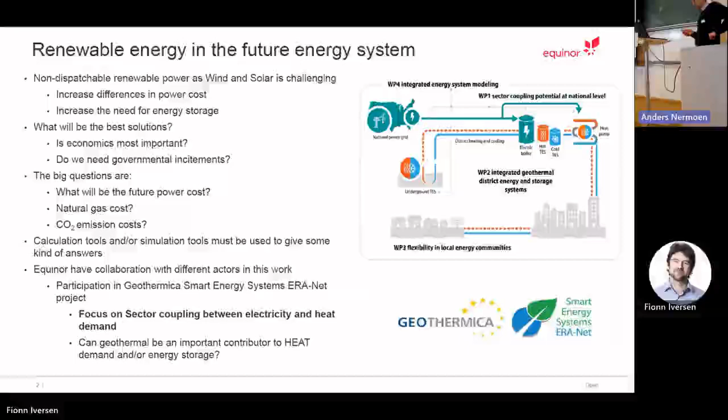So what is really sector coupling of heat, and why is it so important? I think it's to utilize the surplus cheap electricity for heat demand, which shows you have increased the flexibility in the power system. And you can have the co-firing with electricity and natural gas for heat supply - that's a typical issue for Europe. And thermal energy storage is really cheap and flexible compared to a lot of other systems, especially for low temperatures, for example district heating, hot water storage.

As residential, you can have a larger hot tap water tank. Should that be only 200 liters as we have today, more or less? Could that be 5 times as big? So we utilize this opportunity.

I think also by introducing these systems, you can reduce the curtailment of solar and wind power really much. And what is really the fact is that the heat energy demand in Europe is really huge, it's 1.5 to 2 times as large as the power demand itself. So the heat is really important.

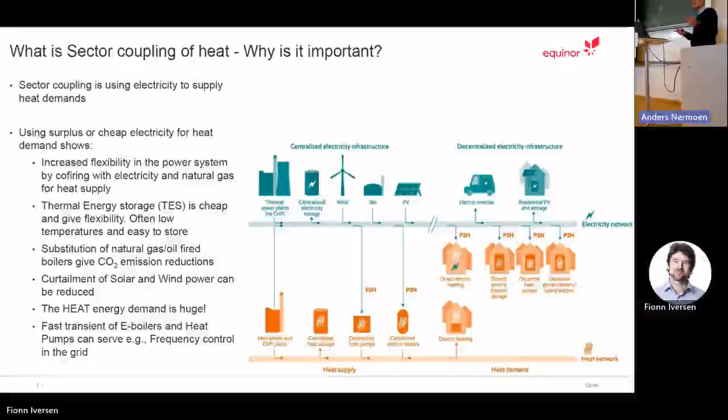One of my points here is to see that if we have the flexibility to use our e-boiler, it can ramp up very fast, so it can also be used as a frequency controller. The same as heat pumps, they can ramp up very fast if you design it for them. So it's not only the producer that can handle this grid system ancillary services. As a user, as a consumer, you can also serve these services. So that's really important.

So in my opinion, flexible heat demand can be a game changer for large implementation of renewables. And you see Europe, as a result of the Ukrainian war, is fighting to get less dependent on natural gas.

It's really hard, of course, since they use a lot of it, but they try as best they can. And we also see that the export from the Norwegian continental shelf will decrease dramatically in the next years. So what will Europe really do? How will they act, and what are the most efficient solutions for them? It's the flexible offtake of surplus electricity, how to utilize that, what's the best systems. And how can we give the best offers for wind farms?

I can give an example from an offshore wind bid in the Netherlands now, where authorities are focusing very much on how this wind bidder can give a flexible electricity demand as an offer in the bid. So if you can offer 1 gigawatt extra flexible electricity power, you will get a lot of points toward the total bid.

And in my opinion, I think this cross-sector coupling is really an answer to be able to utilize this flexible or surplus electricity power. And of course, as I discussed a lot, energy storage by geothermal can be one important issue here.

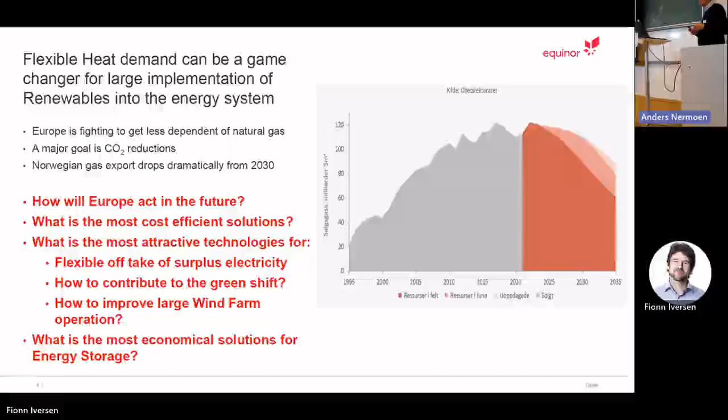So to the next, what are really the expectations on the power demand for the future? This is picked from the Energy Perspectives from Equinor, trying to predict the future. We have two scenarios: to the left, the power demand based on the Walls scenario, which is more or less the current market trends if we continue on the same basis as today. Or we have this Bridges scenario, which you could call the green scenario, the most optimistic scenario related to getting green technologies into play.

And we see the general trend here is that the demand for power is really increasing, close to doubling by 2050. And to the right-hand side, we see that yellow is solar, wind is of course big, and we see the reduction in coal, oil and gas is reduced a lot in these graphs.

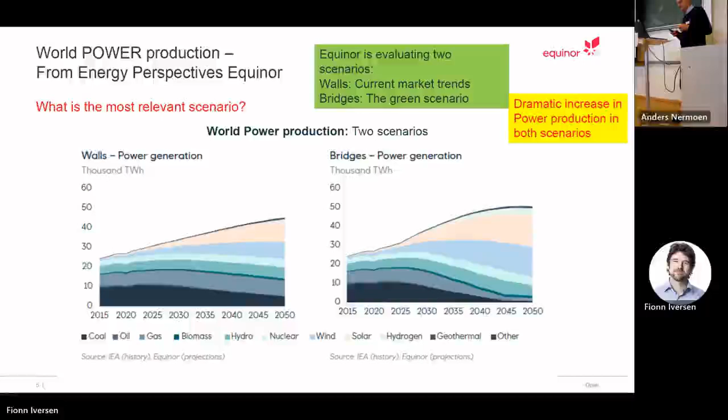If we go to the buildings energy perspectives, also picked from the Equinor estimates, we see that energy demand for heating is really huge. I've tried to explain that 3.5 billion ton oil equivalents is close to 40,000 terawatt hours of energy. So it's really a huge amount of energy.

And you see from the most optimistic scenario, this Bridges scenario, to the right, electricity is a huge supplier into the heat market. Now, we discussed here today earlier that we should not just use electricity directly into the heat market. But I think if we supply heat by heat pumps, that's really a good way to do it. And when we get this surplus electricity in huge amounts, we need to take that flexibility. E-boilers will, of course, play some role, but if we can utilize heat pumps, it will be really good.

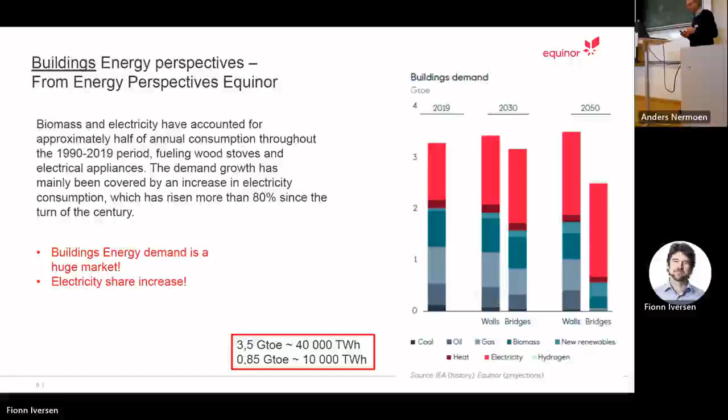And this is also for the EU market. The space heating market for EU, as you see here, is close to 4,000 terawatt hours a year for space heating and tap water demand. The electricity demand in EU is close to 3,000 terawatt hours. So we see that heat is really playing an important role.

And also gas boilers, shown in red here, so it's really a huge use of gas. I think the substitution of gas by electricity, by heat pumps, by geothermal, by everything will play a very important role. And that's really where the sector coupling potential will come into play.

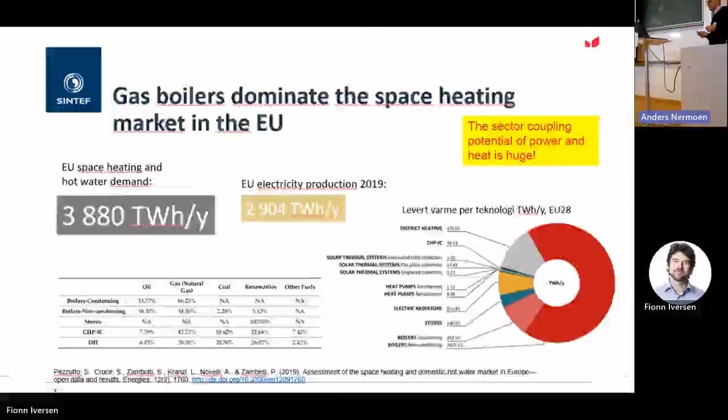And this is some background, and I have picked some results from some simulations we have been doing. We have a good collaboration with SINTEF to look into how the future can be. And here are 5 different scenarios.

So we install a wind park, and to the left bar we have a wind park serving only the electrical grid, and this system has gas boilers. GB is a gas boiler, so the bar to the left, we supply all the heat by gas boilers. So to the left, it's no electricity for supplying the heat.

If we introduce hydrogen as an option, which is somewhat costly, but if that's an option, we see that on bar number 2, 36% of the heat will then be supplied by hydrogen. The rest is still gas from the boiler.

If we then go to bar number 3, we allow electrical boilers to come into play. And then we see that we shift quite a lot of the gas into electrical boilers. So 77% of the heat is supplied by electrical boilers.

And the 4th bar is when we introduce heat pumps as an alternative. Then we see that the heat pump will almost cover 97%. So almost all the gas is substituted by a heat pump, because that's, in this case, economical benefit.

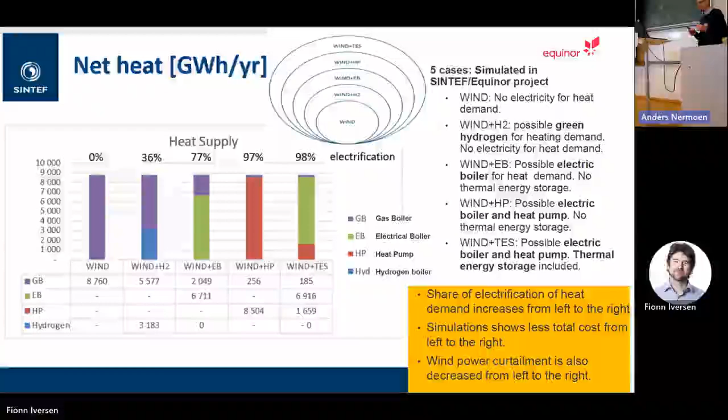And the last bar, when in addition we also introduce a thermal energy storage, we increase the flexibility even more. Then it's a somewhat interesting result. We see that we are close to 100% electrification, but the heat pump will play a minor role compared to the electrical boiler when we have this thermal energy storage into play.

But I'm first to say that all these results are, of course, depending on what prices you set for the electrical grid, what will be the price of natural gas, and what will be the price of whatever. But I think when you have this kind of simulation tools, you can do sensitivities, you can see what type of technology will be most attractive under certain conditions. So I think it's really important to have these results and start to play with new technologies and at least have the best economical inputs that you can have.

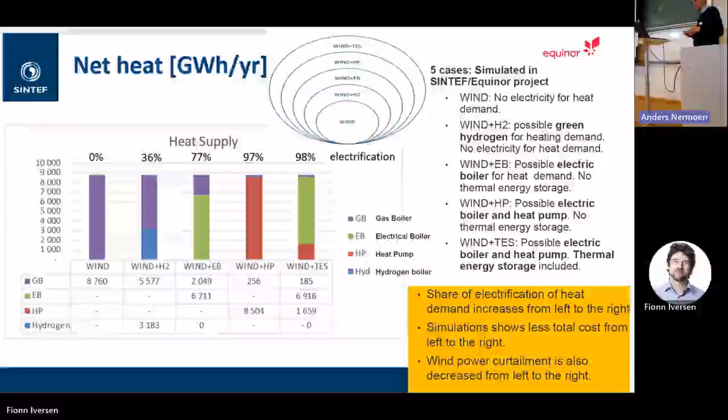So I think in general, the need for flexibility and use of surplus electricity into the heat market is really something important that we should focus on. And what I'd like to say is that this transfer from natural gas into electricity has already started. Europe has already started this sector coupling.

If you look into Berlin, Vattenfall Wärme, they are building now a very, very large tank for hot water storage in connection with their district heating system.

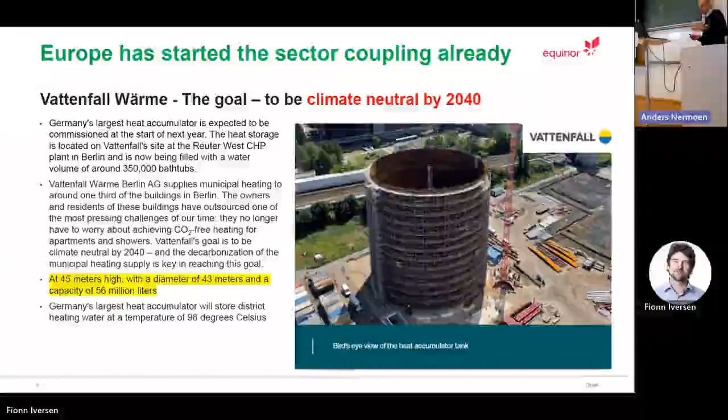And we see also in Esbjerg, Denmark, they are now introducing a heat pump supplying 50 megawatts of heat by using surplus electricity from the wind parks, windmills around. They use the heat pump, run it very hard, very tough, and when the electricity is cheap, store energy into the thermal energy storage, and deliver heat when it's needed.

And what is important, also said by the Vice President of MAN, is that sector coupling is an essential key to climate neutral energy future.

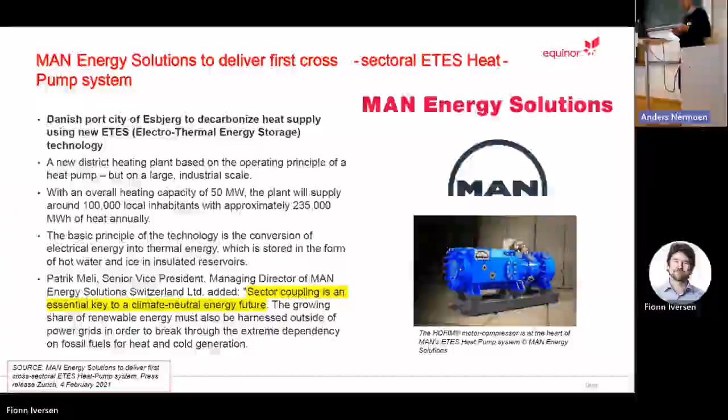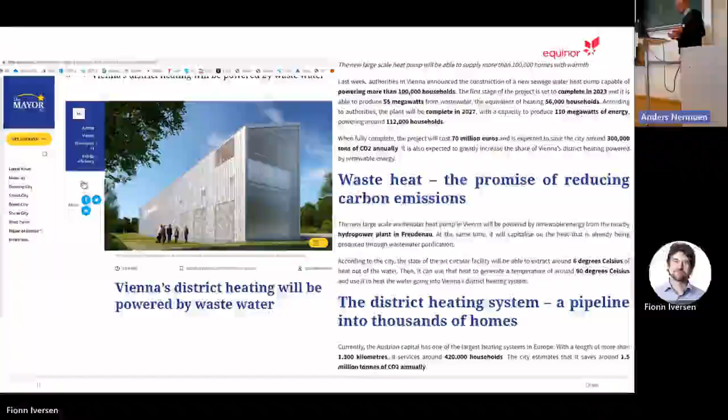In Vienna, they are also using a large heat pump now to produce heat into a district heating system. They use municipal wastewater as a heat source for this system.

And in this type of storage, they store solar energy from summer to winter time.

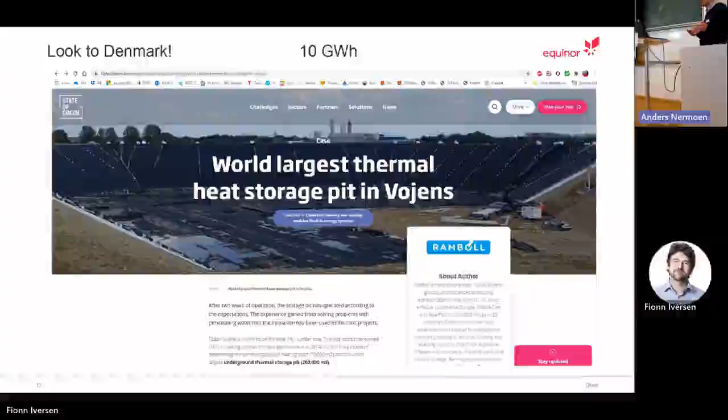So main points, sector coupling of heat. I think Europe is asking for flexible extra electricity demand to avoid curtailment in renewable power generation and improve the income in renewable projects. That's so there's no need to stop the windmills and not to stop the solar when there's too much of it.

And heat has a very large potential for flexibility. You have this water-based system. It's really cheap to store and has very good energy efficiency by using heat pumps.

And as I said, auxiliary services like frequency capabilities in electrical grids can be utilized by the consumer of power and electricity, not only the producer. And of course, if you substitute natural gas, this will be a very good CO2 emission effort.

I think how much of the market can be covered by this? And what will be the needs for more extreme and expensive alternatives? It's being discussed a lot in Norway, can we produce hydrogen, export hydrogen to the energy systems in Europe? How much will then be the need for that? Can the cheaper sector coupling of heat and electricity take a lot of this market? That's a big question.

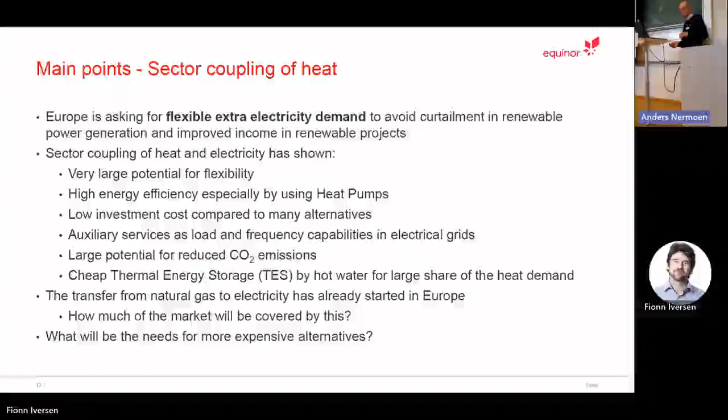So, then I'm finished. Thank you very much.